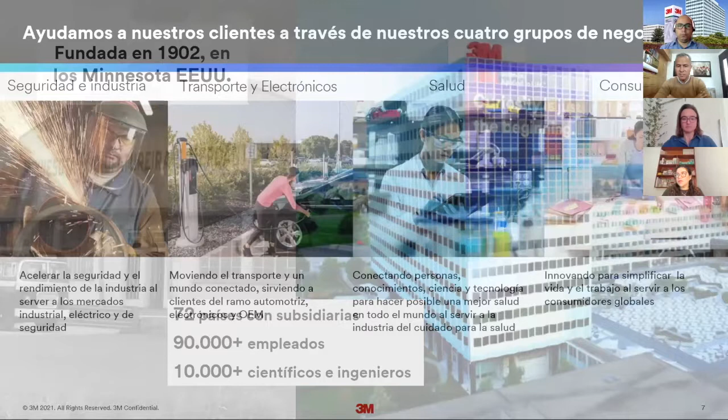So let's move on to the next slide, please. 3M was founded in 1902 in Minnesota, USA, manufacturing based in the US. We have a presence in more than 72 countries. We are more than 90,000 employees and more than 10,000 scientists. Can we go on to the next slide, please?

We are grouped into 4 business groups. The first one is the biggest one, safety and industry. We also belong to the transport and electronics business group, and the health group. And maybe one of the brands or product lines people are more familiar with from 3M is the consumer products we see every day in the supermarket. We can go on to the next slide now.

One of the things that fills us with pride is this type of thinking. For 3M, it's binary thinking — it's black or white — so we always try to never compromise our ethical behavior. So we've been receiving recognition for many years as one of the world-level companies most recognized for this.

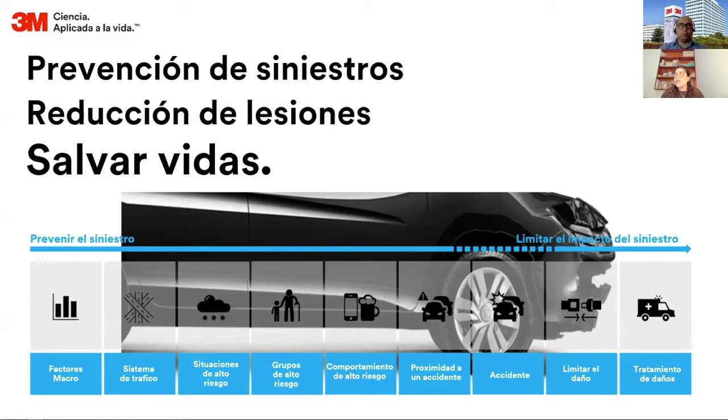Our technology is applied to prevent injuries, and high visibility, as we will see further on, helps prevent fatalities. This generates a reduction of injuries, and at the end, the main objective is to save lives, stopping crashes, from prevention up to limiting the impacts of the crash.

So we know that the main cause of crashes on the streets is related to human factors such as recklessness — consumption of alcohol, use of cell phones, distraction, excess speed, and also lack of use of safety equipment. And of course, there is deficient infrastructure, which in a way aggravates road accidents. So in a certain way, having high visibility can improve this.

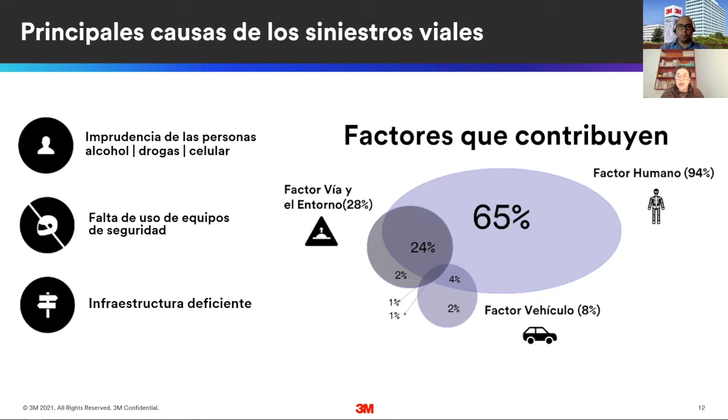You can also see climate factors that can be adverse, and how we can influence the human factor to reduce these failures or errors committed by people with technology. We know that this high percentage in human factors is a lot of the time the responsibility of users, with excess speed, drinking, and the use of cell phones or the lack of use of equipment as we mentioned.

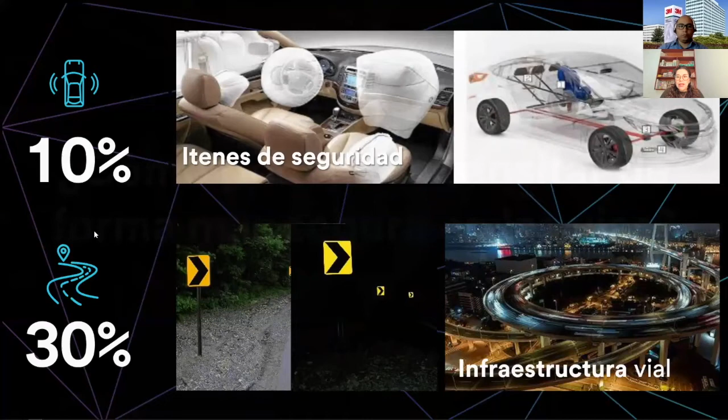Then we also have a factor which depends on the vehicle. The vehicle needs to have active and passive safety systems to reduce the impact of the crash, and we will also focus on this 30%, which is related to the infrastructure itself and how we improve this infrastructure to have some kind of impact on human behavior. So now we will pass to our engineer, Salvador.

Thank you, Malu. So as Malu was saying, the infrastructure also has an important role, especially in this concept of how to make roads safer, keeping in mind that they are designed for humans and humans are susceptible to committing mistakes. Next slide, please.

For this, it's important to clarify this self-explaining roads concept. What are these self-explaining roads? Well, they're basically roads that help people make better decisions. They essentially reduce the amount of confusion, the amount of information that the driver needs to have available, and with this, we manage to reduce the human factor that Malu was explaining.

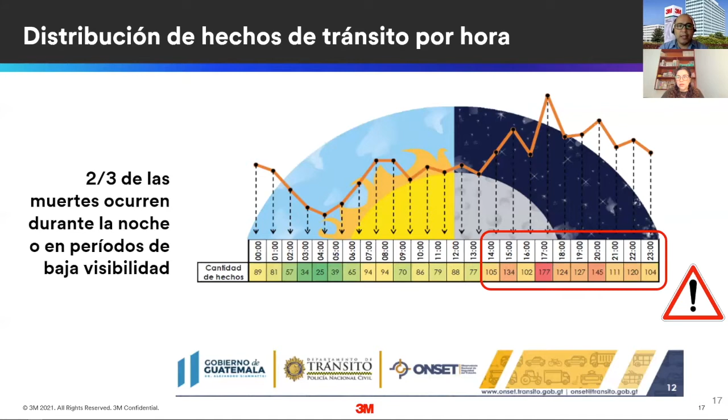So what do we look for with self-explaining roads? During the day or during night, they will pass the same amount of information. And why nighttime? Well, as you can see in this chart from the National Office of Traffic Safety of Guatemala, during night, 2 out of 3 deaths happen in periods of low visibility. This is related to this cognitive process — how humans interpret what they meet on the road.

We've seen that not always what we see during the day is going to be visible during the night. The visual information is reduced, and only 5% of what we see during the day can be seen by human eyes at night.

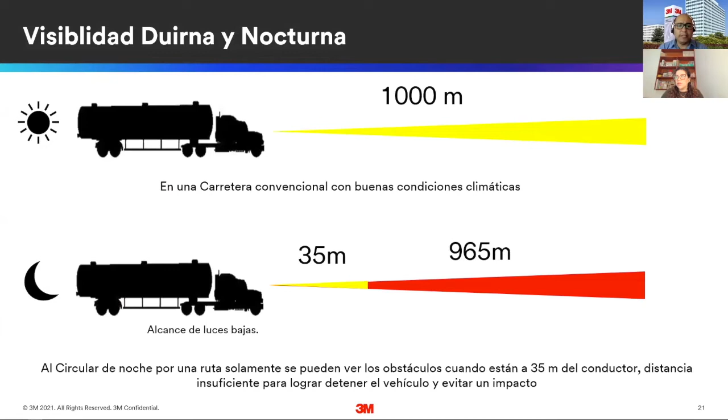That's where we get different types of technologies that will help us have this concept of self-explaining roads. You can see, for instance, how in a conventional road with good weather conditions we can have a viewing distance up to 1,000 meters. When moving at nighttime, you can only see obstacles when they're 35 meters away from the driver. A lot of the time this distance is not enough to be able to stop the vehicle and avoid reaching an impact.

We're going to see how this cognitive process works for humans. Humans have as a fundamental tool their eyesight or visibility for their decision-making process. The cognitive process happens when a person starts having a perception of the elements that are there, to be able to associate risk levels and react. Usually this perception and reaction time during normal conditions happens between 1 to 2 seconds. Afterwards, there is the physical execution of the maneuvers that the driver must take, or the adaptation the vehicle must take. These braking distances determine the capacity we have, or not, of avoiding harm.

According to Queensland's government, Australia, at 40 kilometers per hour we need 17 meters and 2 seconds to make a decision, plus 13 meters of braking distance. This adds up to at least 30 meters needed to brake and avoid an issue. If speed increases to 90 kilometers per hour, the perception distance moves to 38 meters, braking distance to 45 meters in dry conditions, and 83 meters total. In wet conditions these distances increase.

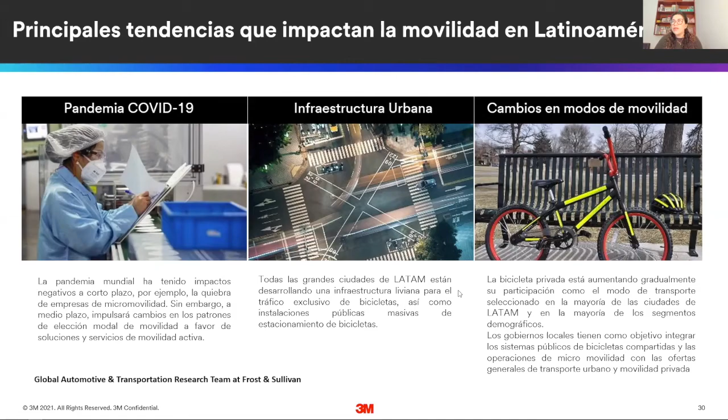This also comes from World Roads for Life, an initiative that will help a lot to have low speed zones. When we talk about low speed zones, we are talking about places where mobility is limited to 30 kilometers per hour or less, where we can protect the people that transit, where we can live through different types of users,

where we've seen a limitation of participation, where they have not been a priority for many years due to laws that give priority to vehicles, and in a certain way to have places where we can place people and cars in the same environment, and we will have healthier and safer roads.

For this, the trends and challenges are: how do we transform these cities? How do we make them more inclusive? How do we generate spaces where other types of users also have the same rights and the same responsibilities? And we can have safe interaction, safe action, where we can reduce the number of crashes.

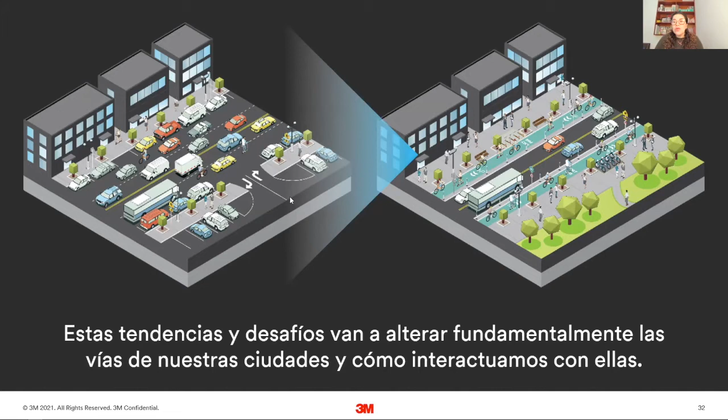Sadly, when we don't have this type of transformation in a lot of cities, we've seen an increase in the use of bicycles, for instance, with a direct proportional increase of fatal crashes related to cyclists. So it is key to alter the order of how we drive our cities, but in a way that promotes their use without having these crashes in large amounts.

So thinking about infrastructure for people, as WRI says in their Cities Safer by Design book, we need to redesign roads with the objective of including the needs of all users, especially those who perform other public activities.

Working today with zones or low speed zones will have benefits on health, on the quality of the air, on safety, on the environment, on equity, and will also promote that public and private companies work towards developing innovation of solutions that can reduce this possibility of crashes.

Basically, this is because we know that speed kills. There are studies that prove, there's scientific evidence that shows that speed is a factor that causes most crashes, and when we have vulnerable users, the possibility of death can be even higher.

A vulnerable user, a cyclist, does not have the car's armature that protects them. They don't have the active elements that can reduce the amount of impact. So at a speed of 50 kilometers per hour, the possibility of dying can be higher than 85%.

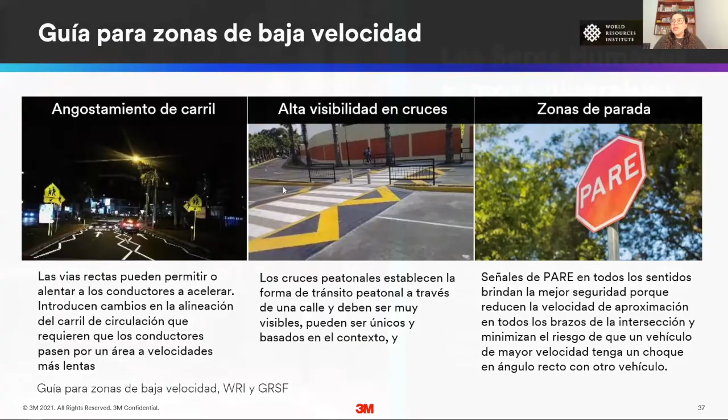If we can work through the redesign of cities with these added security measures, that can bring us great benefits for cities, keeping in mind that human beings are vulnerable and we make mistakes.

For a long time, the focus has not been on vulnerable people, but on individual responsibility. In a certain way, the road must forgive these mistakes and must not punish you with death or a serious injury. So you can see how one of the places prioritized to reach efficiency with results and technology and reach low speed zones are school zones.

School zones must be safe places to learn and travel.

must help them become better citizens, to learn and educate themselves as citizens in the near future. They will be using the road as drivers, pedestrians, or cyclists with another degree of responsibility. So we know that children

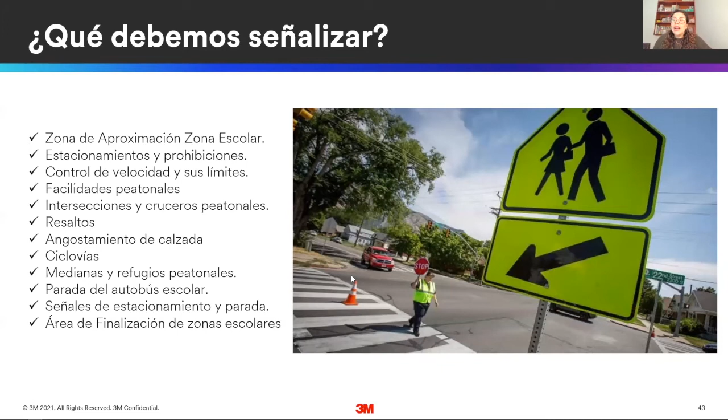When we think about signaling, what must we signal? Approximation zones, parking, speed control, road narrowing, bike paths, medians and pedestrian shelters, school bus stops, and at the end, always note what the start and the end of the school zone is.

Also, tactical urbanism in school areas must be related to low-cost engineering, where in a certain way we can also increase the visibility of intersections, like in this example, where the children will know that this is where they need to cross. You can see that increasing visibility, the perception of drivers can happen at a higher distance, must be a lot faster, and in a certain way they can locate the crossing zones that the kids can cross in a safer manner.

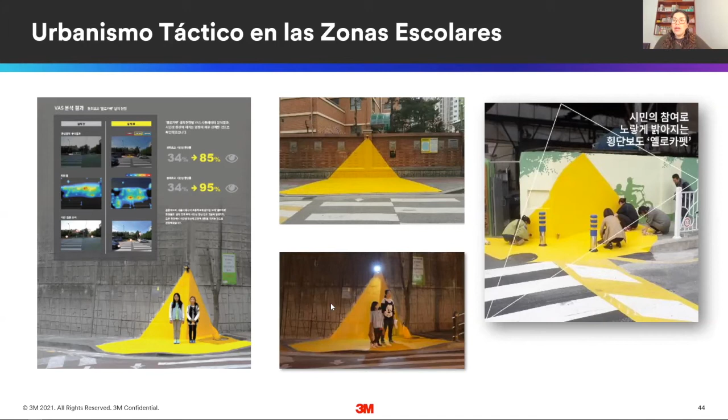Other proven countermeasures within urban mobility can help us achieve safer mobility with the implementation of high visibility technology. A few examples we'll mention are sidewalk extensions, mid-block crossings, bike lanes, and intersections.

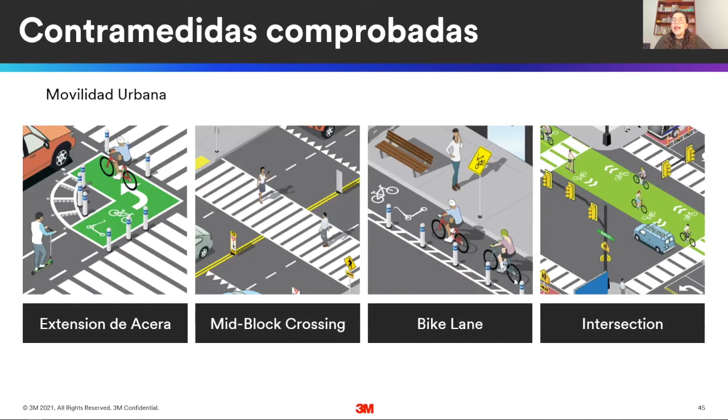When we speak about curb extensions, we're talking about making use and appropriating a bit of the intersection to manage a safer crossing, increase the turn zone of vehicles, reduce vehicle speed within the intersection, and give way to zones where micromobility users, bike users, or pedestrians can be more protected against blind spots and vehicle speeds in this intersection area.

We can see how the corner of the sidewalk is extended with marking posts and with markings that will have high visibility.

This type of appropriation, the usage of these spaces, helps to calm traffic. It will have lower speed zones, reduce speeds, and it's space dedicated for everyone, especially protecting the most vulnerable ones. These are simple, scalable solutions you can increase for use at higher volume intersections in a city, and they are budget friendly.

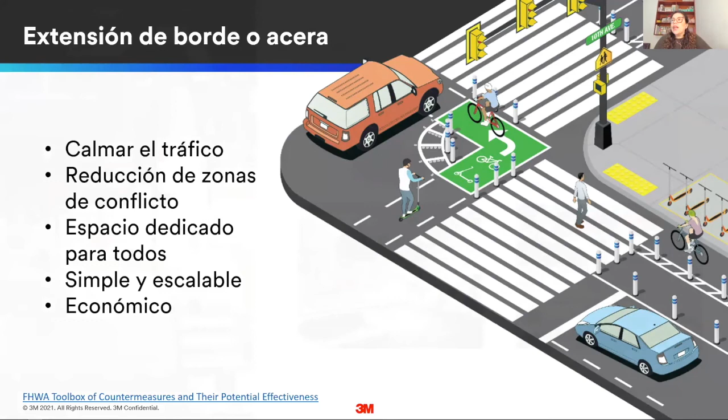This is within the recommended areas. In several guides you can see these guidelines, and this is also a manual from New York City, where we can already see the implementation of this type of solution.

We have this increase towards the sidewalk, so the visibility angle of the vehicles makes it so that cyclists will not fall into the blind spot. By increasing the area, the blind spot is no longer an issue. The driver will be able to see the people crossing, giving them more time to perform braking or speed lowering maneuvers so they will not have a collision.

Another type of solution that must be observed, studied, and analyzed is when, in a certain way, we observe human behavior. In this case, they may be on blocks or roads where the intersection is too long, and the natural behavior for people makes it so that they cross — essentially jaywalking. In this case, we have to formalize the use that is really happening to know how we can add to this.

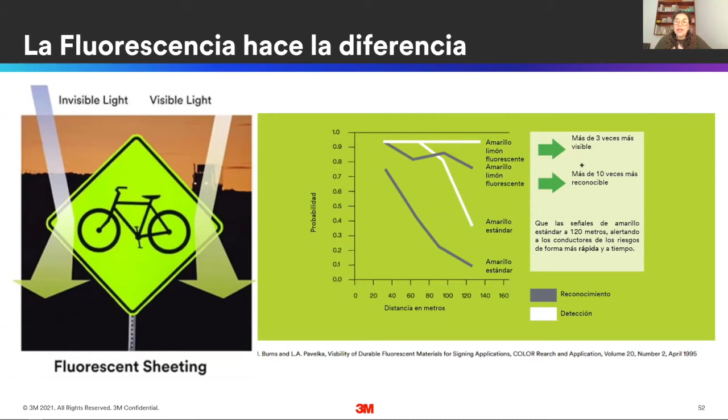Keep in mind that all these signaling implementations in these places, it's always recommended to use fluorescent coloring. In a few guidelines for a few countries, the warnings for pedestrian crossings, school zones, and bike lanes are regulated in fluorescent colors, but not every guideline requires this. It's always recommended because fluorescent colors are much more visible daytime and nighttime, and they push back UV light that is usually invisible to our eyes, promoting faster visibility and recognition times, and warning the driver at a higher distance on the road.

Finally, about intersections: we need to keep in mind that intersections are generally the most critical points. It's where most crashes happen, and where most deaths and serious injuries happen, because vehicles hit each other at a 90-degree angle or straight on.

We've had research that says implementing roundabouts is an effective measure, but there are cases where we simply cannot implement a roundabout.

So we recommend that intersections have more visible pedestrian crossings, whether with the use of streetlights or not. Don't forget that we need vertical signaling and pedestrian crossings. Don't forget we also need segregation elements for the crossing of micromobility vehicles or bicycles, and horizontal signaling that will improve the visibility of crossings in every weather condition, as well as bike paths, which in a lot of our cities are emerging in a certain way.

These changes have happened because of the pandemic, but this must not be lost. We must not forget the need to separate cyclists from vehicles on roads, especially when there's no reduction in speed limits. Combining a road with different mass sizes and speeds will cause more serious crashes in the end. So cyclists must be marked out and completely separated using easy-to-install elements like vertical signaling, separating elements, and pavement marking.

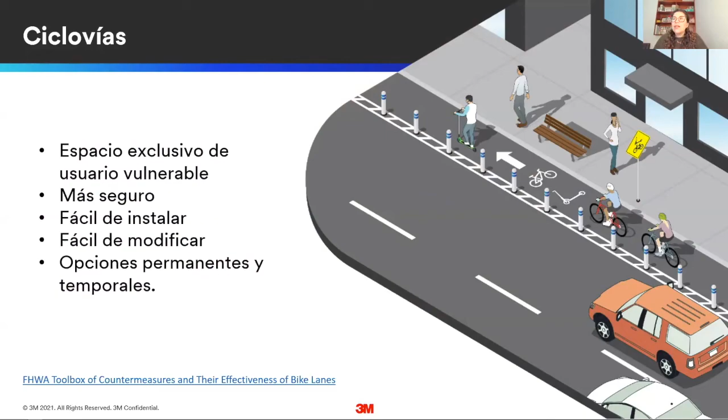Up till now we've talked about applying technology to infrastructure, but we also need to speak about high visibility implementation on the vehicles themselves, especially vehicles growing in use within our cities, like motorcycles. In many cities, due to the need for faster and safer transport to avoid infection, or due to the popularity of delivery services, we've seen an increase in motorcycle use.

When motorcycle use increases, we also see an increase in road crashes related to this type of vehicle. So for bicycle or motorcycle users, they must always be visible, since they are more vulnerable and must be seen under critical conditions, especially in blind spots, at intersections, and in low visibility conditions where public lighting may not be sufficient. The vehicle itself, the rider's equipment, and other elements must all have visibility.

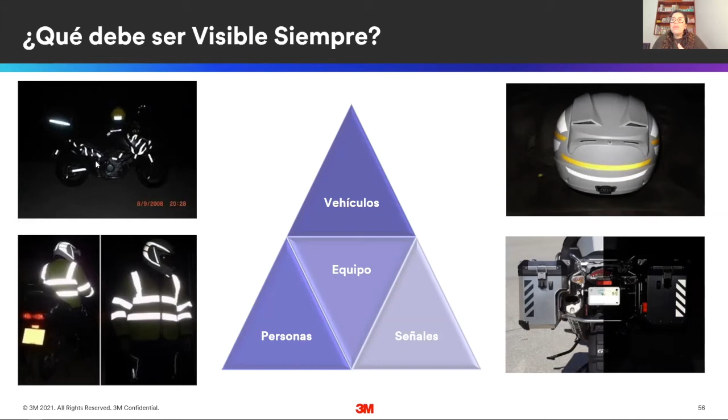We're talking about the use of high visibility jackets. In some countries this is enforced by regulation, but if a rider doesn't use a high visibility jacket, the vehicle itself must have this element. We recommend the use of reflective strips for signaling, modified for vehicles that are more vulnerable like motorcycles or bicycles. These elements promote higher visibility and guarantee especially the lateral visibility of the vehicle.

Looking at a parallel with large size vehicles, which have regulations requiring the obligatory use of reflective strips to help avoid collisions, we see the reality is very similar for motorcycles. Trucks or large vehicles and passenger transport become serious obstacles on the road when not seen, and other drivers are likely to crash into them if they aren't visible laterally or from behind.

This could cause a fatal or very serious crash. While a motorcycle, if not seen by a larger or heavier vehicle, faces the same risk - if they're not seen and are crashed into, the possibility of the motorcyclist dying is quite high. Either way, if trucks or motorcycles are not visible to other drivers, the motorcyclist always ends up getting the worst of the crash.

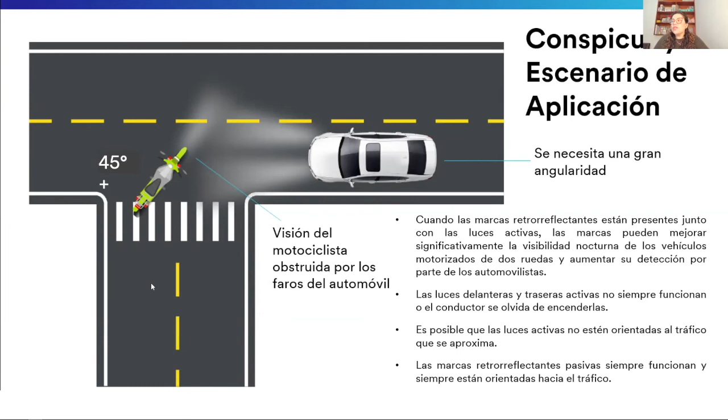And this is how we get the amount of impacts among types of vehicles, with the motorcycle that can generate the fatal road crashes with serious harm.

We will be talking about the same situation with biking culture. There's been an increase in cyclism in our cities, because that's great. Bicycles are a means of transportation that for a long time should have been more promoted and more used. Sadly, a lot of the infrastructure is not adequate for people to take the decision of using their bicycle as a safe means of transport.

But on top of that, while the infrastructure is being implemented in our cities to give space to these new means of mobility, cyclists must be aware of improving their visibility conditions to reduce the likelihood of crashes. A lot of the time the visibility a cyclist has is not the same at night compared to during the day.

This is why it's important for cyclists to evaluate their conditions, especially at night, to guarantee their visibility, so they will avoid being hit, run over, or impacted by another type of vehicle, which, as always, the cyclist gets the worst of it. So the use of reflectives is also important here.